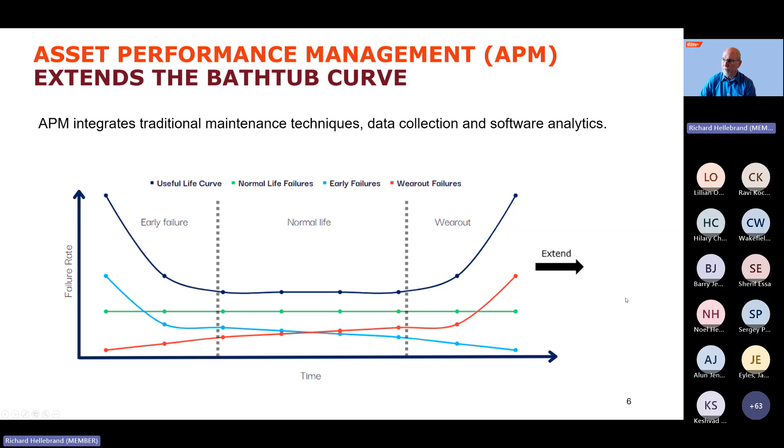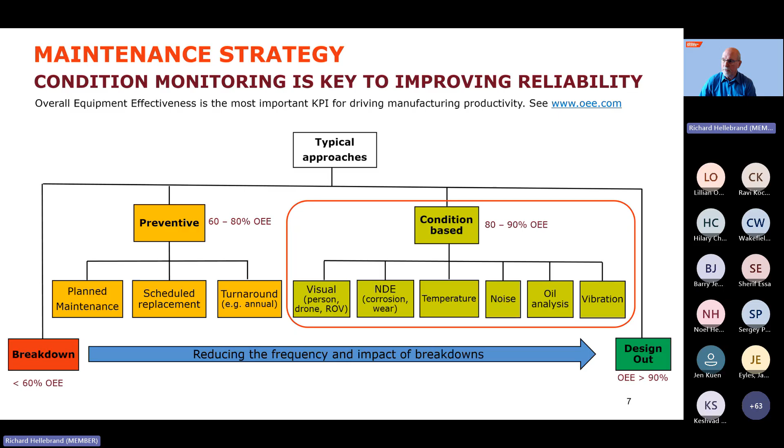It's very hard to do that. I've got some background in this, but I'm very interested to hear what TÜV Rheinland have got about APM, because really when I was practicing, it wasn't APM, it was just asset integrity management, and the new technologies were just coming in as new. I think everyone probably on the call knows that you've got easy availability of infrared cameras, oil sampling from basic taking a sample and sending it off for analysis, to actual remote full online stuff.

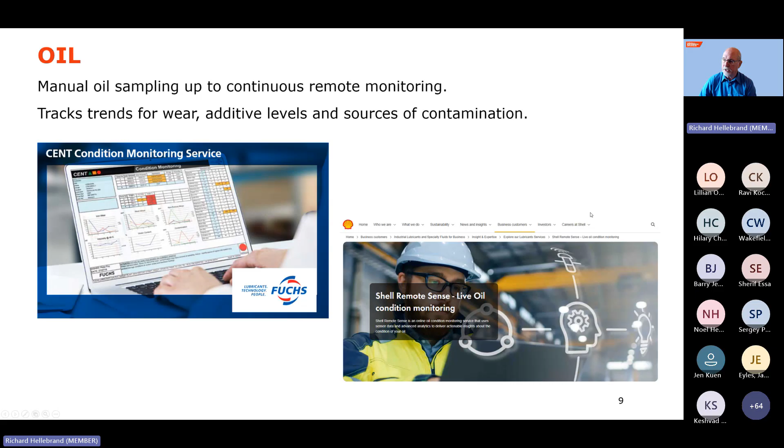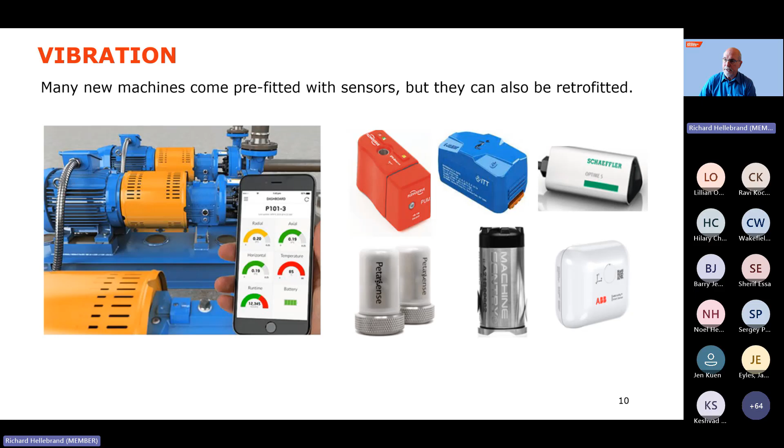And plenty of other suppliers are around. And the same with vibration monitors, which are mainly on rotating equipment - lots and lots of suppliers of these, from cheap and cheerful up to very sophisticated, networked, ATEX approved designs. So that's it from me.

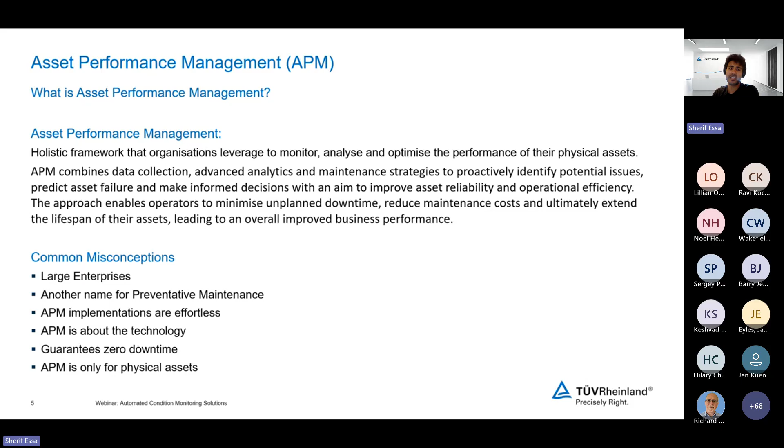And so why do people gravitate towards APM or any technology out there on the market? At the moment, as I'm sure most of you will know, there's a lot of challenges in the market, whether they're political or site specific or equipment specific. But ultimately, we're all in a market that requires incredibly reliable assets with very little investment that's willing to go into a lot of these assets. So as engineers, our role is to get the most out of our assets with as little investment as we possibly can put into these assets. It's not an ideal world, but it's the world we live in.

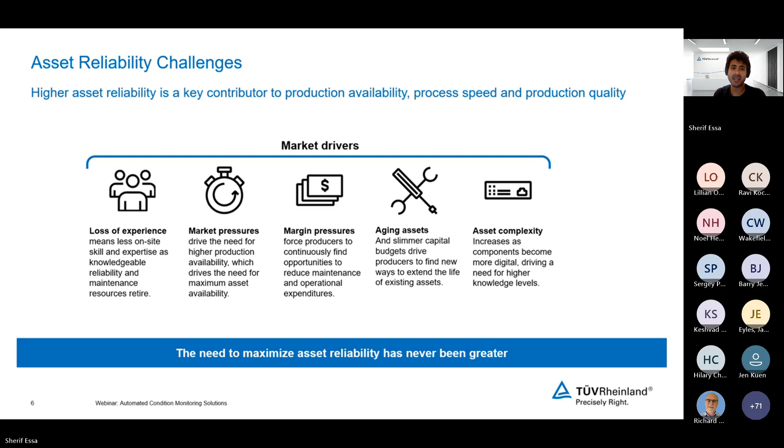And so why does APM fit in? APM fits in because it promises a lot. It promises to minimize your spending on OPEX. It promises to improve your uptime. And if you believe the ARC survey that was conducted, most operators can eliminate between 3 to 5% of their unplanned downtime. So obviously the apple is there, it's big, and a lot of you will want it.

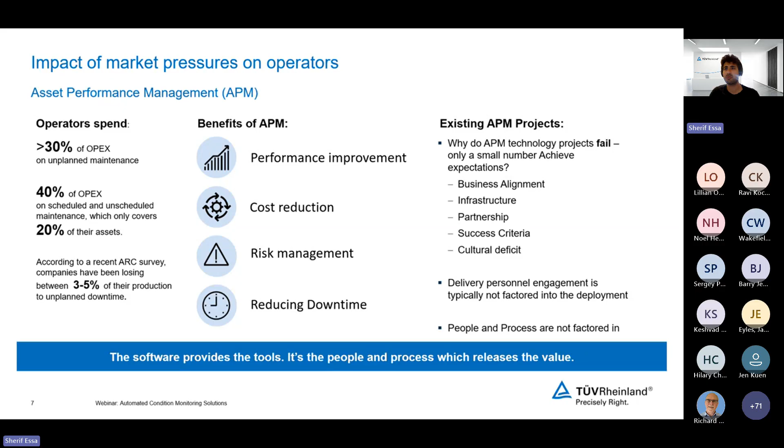But unfortunately, the reality of APM is that it often doesn't meet expectations. And that's largely because, at least in my experience, the people and processes aren't generally aligned with the technology. There's a lot of focus on the technology, but people generally leave the people and process out of it. Ultimately, software is just software. It provides you with more information or more insight, but it's your people and process that will drive the value, and that's what will actually make the difference.

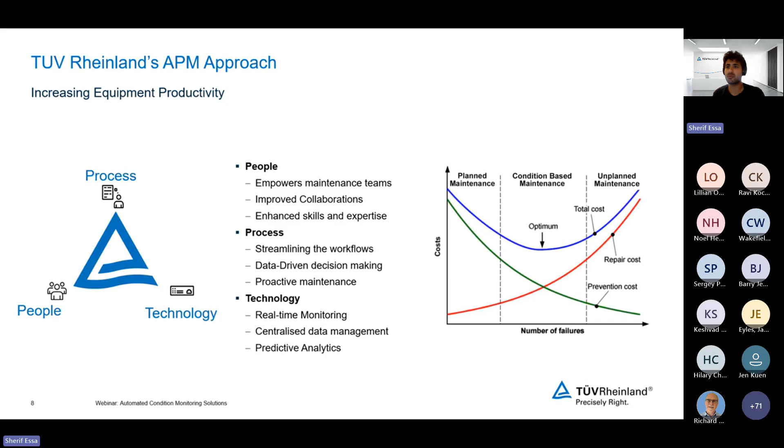So this is the TUV approach, and this is what we try to bring in as part of our organization. I'm sure as mechanical engineers, a lot of you will have seen numerous bathtub curves. But essentially what we believe in our organization is that if you bring the people and process together, you can reduce how much you spend on technology and also improve the effectiveness of the technology that you deploy, bringing you somewhere near the middle. And that's the optimum place where you want to be, where you're spending just about the right amount of money on the technology to get the real value out of it, without the excessive costs of some of the technology out there.

Moving on to the next slide. So TUV's got an approach for both static and rotating equipment. For this part of the presentation, as I mentioned at the start, I'll be largely focusing on the rotating equipment with the sensors on board. If you go to market, as Richard mentioned earlier, there's thousands and thousands of sensors out there. And a lot of them will promise you the world, as sales will commonly push out. But it's down to you to make the distinction and prioritize where these sensors make sense. The best sensor for you, you should be able to determine from your detailed risk assessments, whether that be RBIs or failure mode, effects and criticality analysis.

And these detailed risk assessments will tell you where you should be putting sensors, what degradation or failure mechanisms you're looking for. And as a result, if you're monitoring these things, you'll be able to identify the failure long before it occurs. And it'll give you that value that you're after.

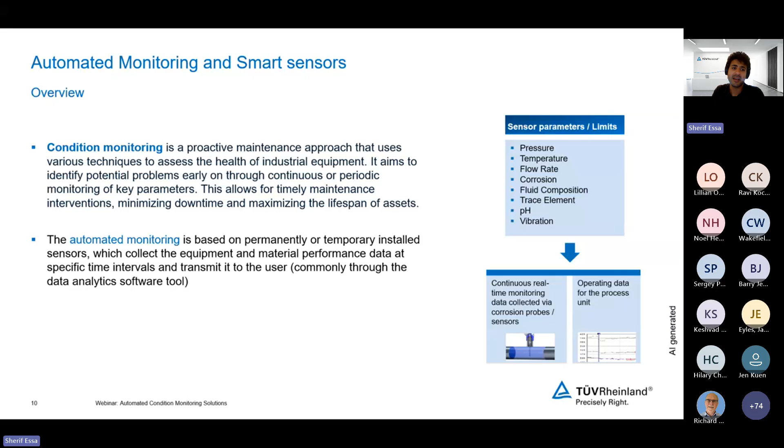So I'm not going to go into detail of all the sensors out there. You can use them in numerous ways, but feel free to do your own research on them. But as part of today's presentation, I'll be focusing on the ABB sensor. But just to reinforce Richard's message, there are a lot of other sensors out there. The ABB sensor is one I'm very familiar with. I can talk about it for days, but there are other ones out there.

So as I mentioned before, although I am focusing on the technology, it is important to remember that the people and process bits are what will drive a lot of the value out of this technology. The technology is just one attribute of what you're going to get out.

So on screen, I've got the ABB sensor. It's about the size of your hand. It's relatively small. It's got a lot of features to it, but two key features that I'd like to bring out are that it's got a 15-year battery and it's jet proof. So you can put it in most environments and it will survive fine. It's also ATEX rated for those who are concerned.

What this sensor does is it measures some key metrics from wherever you mount it, and the key ones I've listed on the screen. And then using the measurements that it's taken, it will calculate some other metrics, and all of them are listed down here. So you've got the vibration side of it, but it'll also calculate misalignment or cavitation, depending on the type of equipment that you mount it on. And all this data is pushed into this neat platform, and it'll give you visibility of the data, but it's down to you guys as the engineers to make the decision out of this data.

So going through the first example, this is a sensor, and I'm displaying a vibration period of 60 days. The sensor has been in operation for 60 days. And for those of you who will have already spotted it, in some cases it's gone above the threshold. In other cases it hasn't. But when you first mount these sensors, they don't just work immediately. They take a little bit of time to gather enough data, and you set the right benchmark.

It doesn't happen overnight. But once you've got the right benchmark, the engineers will play with it or tweak the sensor settings to redefine what is the upper threshold, what is the medium threshold and what is the lower threshold in terms of where this asset should be. And this is where the reliability engineers get very keen and like to look at this kind of data.

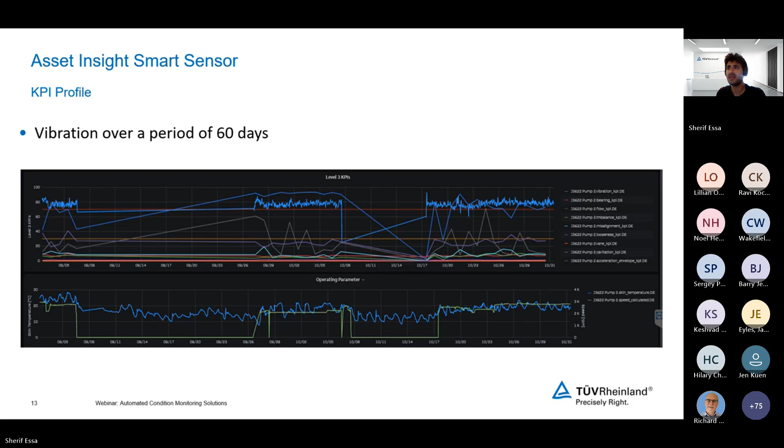And one of the most rewarding factors from my perspective is that you can see once the bearing was changed, or sorry, the issue was addressed, you could see the system operating again in the safe threshold. So the work was done, and it was also done to a point where the asset is safe. So there's less residual risk in this particular asset.

And this is always good reaffirmation, at least from an operator's perspective, to see that yes, the work that's been done on this asset has delivered the value that you anticipated it to deliver.

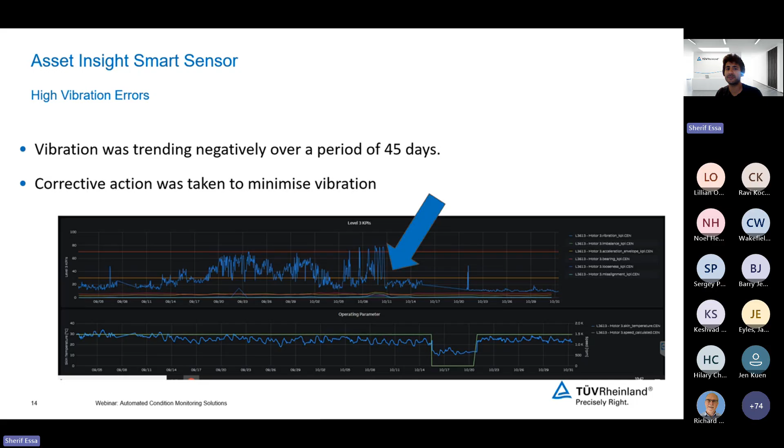And again, after the work, you could see that the system has gone into the safest thresholds, or back to normal operating conditions. So with a little bit of forward planning, you can address issues long before they turn into serious ones.

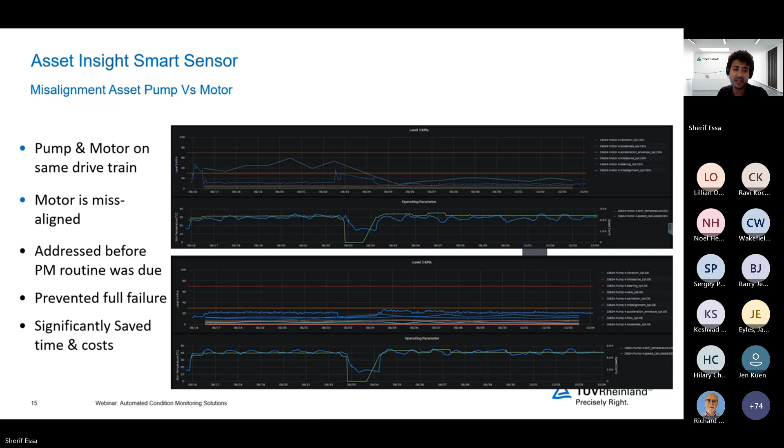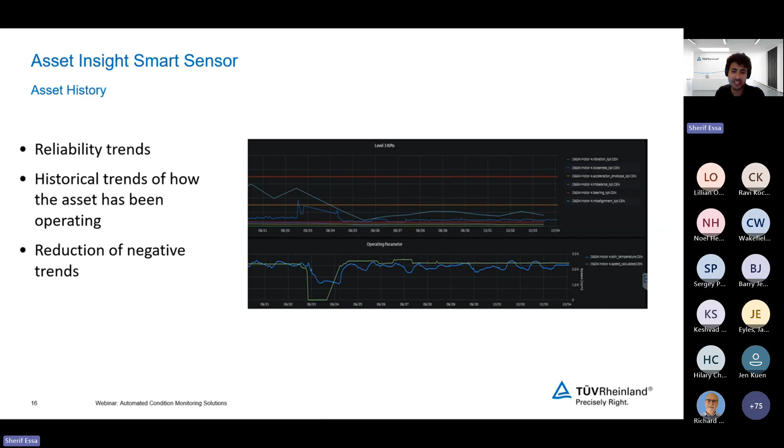So if you've got motor A and motor B, and they're not behaving similarly or there's something different about them, then you can start to pick up these trends earlier, address them and introduce them as part of your people and process changes. But ultimately, the key message is that technology is just one attribute of your maintenance reliability. It's the people and processes, and how they adopt the technology, that'll give you the value. Now, I'm going to pass on to my colleague, Sergey, who will talk about static equipment.

Sergey? Yes, I think I'm unmuted now.

Thank you, Sherif, for these informative insights into condition monitoring of rotating equipment. In addition to rotating equipment, asset performance management equally applies to condition monitoring of static equipment, and this is my area of expertise. My name is Sergey Putintsev. I'm business field manager within TÜV Rheinland UK, responsible for industrial inspections, material testing, and non-destructive testing.

Today, I will look at automated condition monitoring solutions for corrosion monitoring, which is the most common damage mechanism at chemical and petrochemical facilities. There are other damage mechanisms, for example creep and creep fatigue, especially in the power industry, and there are very interesting automated sensors developed for those specific applications. If anyone is interested, please contact me and I will provide further information. But today, let's dive into corrosion monitoring.

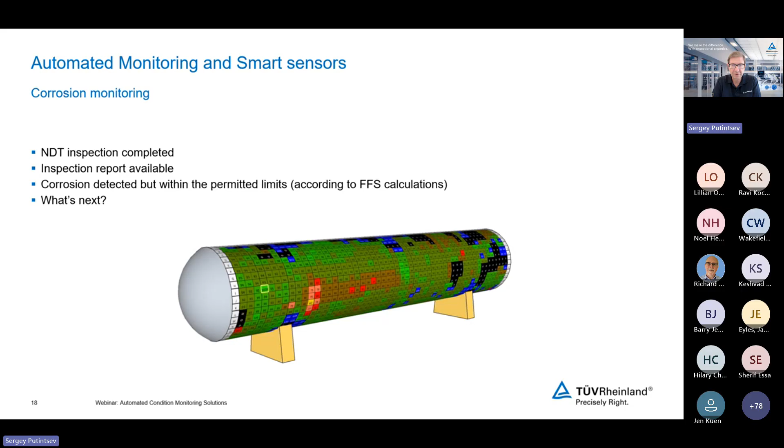These questions will be: do we consider general corrosion or localized corrosion? In most cases, we are talking about localized corrosion. Is the corrosion rate linear or non-linear? Again, in most cases, it is not linear. And do we have detailed information on how the assets operated? The answer is yes, but it's not commonly consolidated with the inspection data. So this raises a number of challenges.

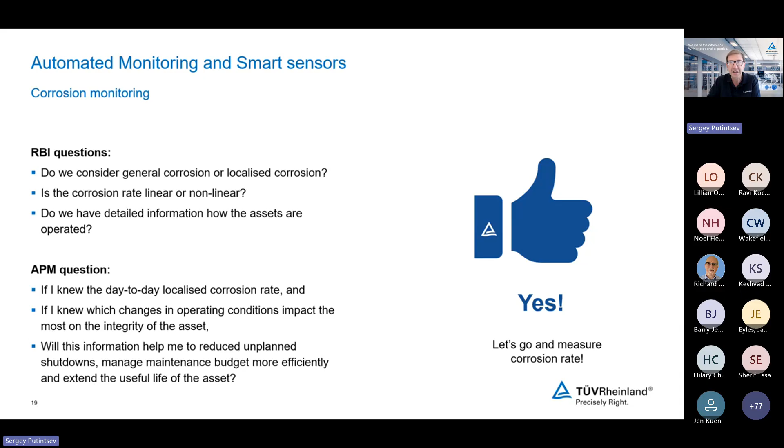Maintenance managers and process engineers would ask themselves: if I knew the day-to-day localized corrosion rate, and which changes in operating conditions would impact this rate, then could I run my assets more efficiently, manage them better and extend their life? Of course, the answer is yes. So let's go and measure this corrosion rate in order to answer those questions.

Here, let's compare the data that we can collect through manual inspections. When we talk about corrosion measurements, we basically take wall thickness measurements. We can do it manually through, let's say, manual UT, and compare it to automated monitoring. This example comes from one of our partners in the US, where a certain asset was monitored on a continuous basis, and inspections were taken at a regular interval every second month and plotted onto the graph.

As with any manual NDT, there could be some deviations, and you'll always be asking what the reason is. Is it exactly the same location where the measurement was taken? Was there any impact of temperature, or maybe a wrong calibration, or could it just be human error? That always comes with manual measurements.

But more importantly, if we take these measurements for granted, there is a question: how could I calculate my corrosion rate? Am I crossing these dots this way or a different way? So which corrosion rate am I taking? Is it the red line, which shows steep growth of corrosion, or the much more stable blue line?

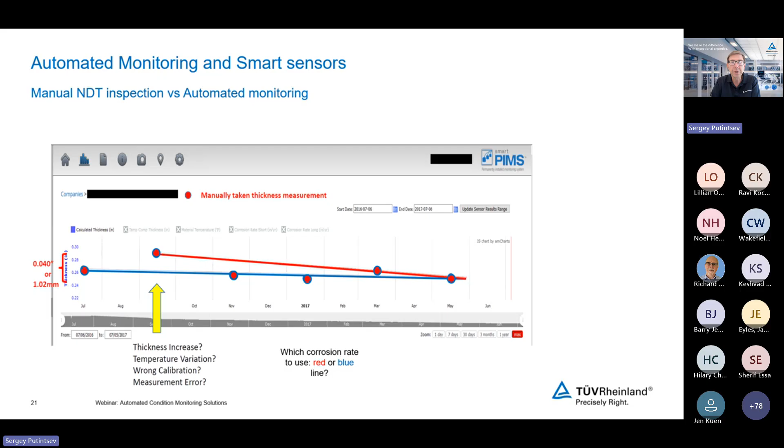So what happened in this specific case is that, in parallel with manual NDT, there were sensors being installed at the same time which were taking measurements every hour, because that's a benefit of an automated system. You can program it and take measurements at any intervals that you wish. Then we can plot the data and compare automated measurements with the manual ones.

And here you can see that the data is much more accurate because it is collected exactly from the same location, exactly at the same condition. But also you can then analyze the trend and compare it to any changes in the processes.

And what happened here is that there were specifically two changes in the process which immediately impacted the corrosion rate. That was picked up by the sensors because they were taking very frequent and accurate measurements. Obviously that wouldn't be possible just by looking at the manual UT measurements that we commonly have in our facilities.

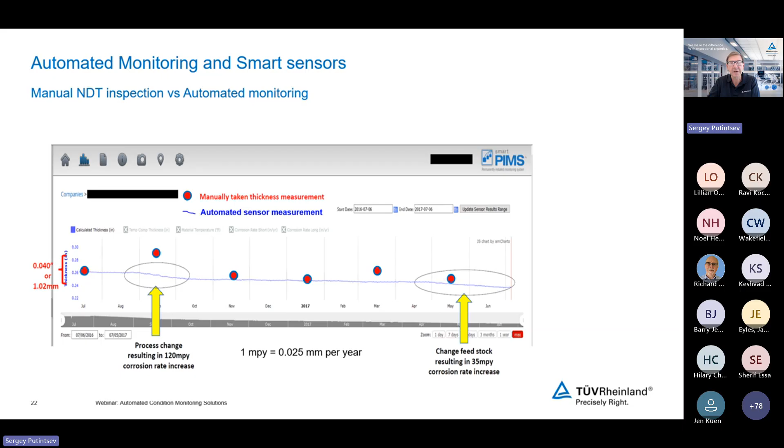So the advantages of sensor technology is that corrosion is very rarely linear and continuous. There could be unexpected and irregular intervals where something prompts corrosion to accelerate, and something that inhibits and depresses the growth.

And for that reason, periodic inspections with very long intervals between inspection points are not able to raise the integrity safety alarm in time.

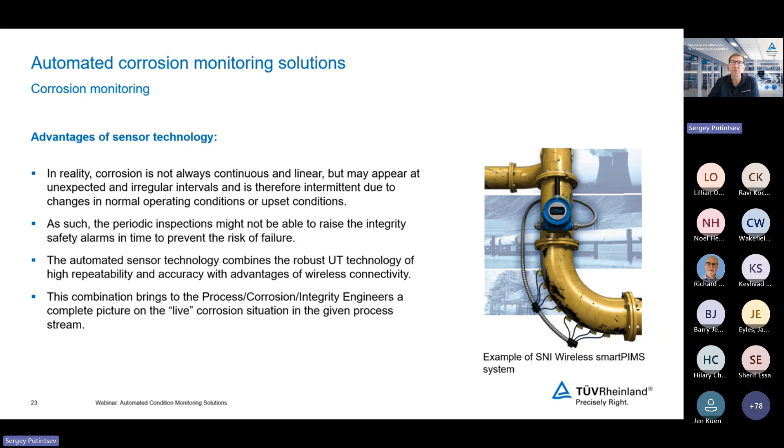So automated sensor technology is based on a very robust UT - basically UT technology, but with very high repeatability and accuracy. It's also combined with wireless connectivity, because you can control and obtain data from those sensors on a wireless basis. That provides quite a lot of advantages, not just for maintenance people, but also for process and corrosion engineers.

Just very quickly, how it works. Richard correctly said that there are a number of sensors. I think you have much higher variety of sensors for rotating equipment, much less variety for corrosion monitoring. Nevertheless, there are a few leading brands that exist in the market.

Sensors themselves are attached to the surface. They can go through coatings. Generally the insulation will have to be removed, but then it can be put back, and the sensors are attached to the surface and remain there. They can operate at low temperatures as well as quite high temperatures.

They are all, similar to rotating equipment, powered by batteries, which last quite long nowadays compared to the early days. The data is transmitted wirelessly - that's the most recommended part. However, you can also connect it through a wire, making a wired connection either directly to your system or to the gateway.

And I think where we actually see more difference between the sensors is not the sensors themselves, but how they're connected, whether they're using a LoRaWAN system or WirelessHART, because there are pros and cons of both connection systems.

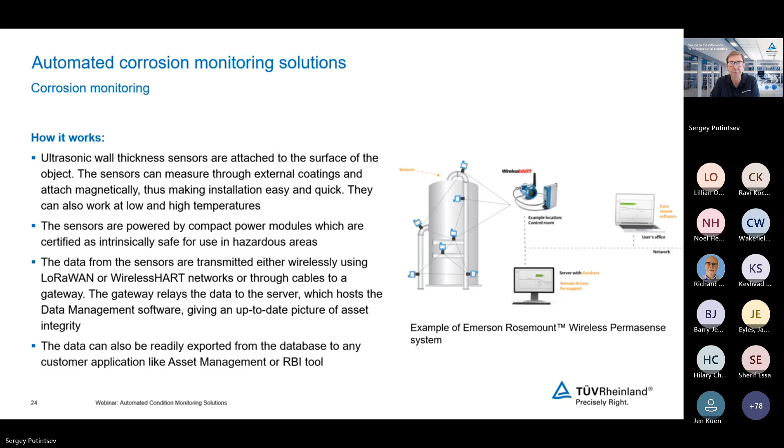I mentioned already the advantages and benefits of automated monitoring for corrosion, and commonly people look at it from a cost savings benefit. That's for maintenance and integrity, and it's absolutely correct, especially if we consider placing those sensors in areas which are difficult to access, or where the cost of removing insulation, recoating, or even getting closer to the object could be more costly than actually performing the inspection. So obviously the automated sensors play a much better role in it.

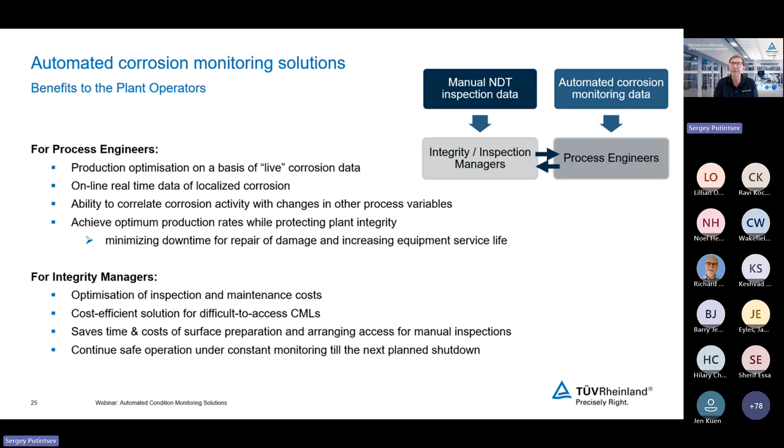However, what I would like to emphasize, and we see this more and more, is the benefit for the process engineers, because they immediately can have access to live corrosion data over a period of time, and they can correlate this to any changes in the process. That is extremely valuable information, because it allows them to optimize production rates based on tweaking certain process characteristics on their plants.

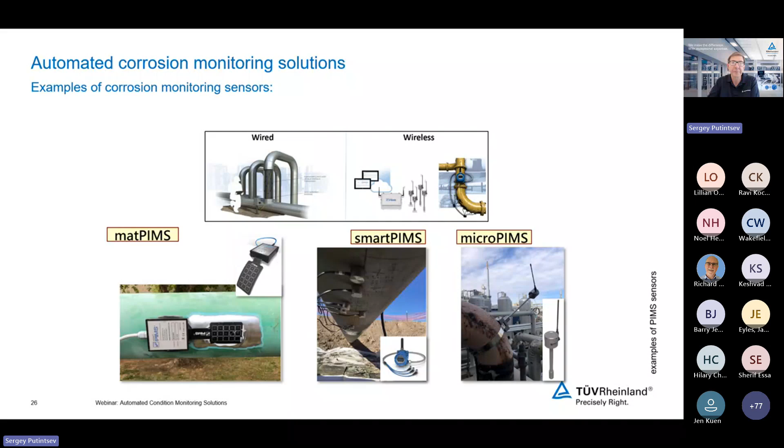Obviously, in an ideal world, and maybe that's what will come in the future with some of the new developments we are seeing, the whole asset surface, or at least critical areas, would be covered with sensors. That would be, I think, the future.

But at the moment, that's not the case, because let's admit it, those sensors are expensive still. The prices are going down as the technology develops, but nevertheless, at the moment, it will not be economical to cover the whole asset with those sensors, especially since UT-based ones are just taking point measurements. They only measure wall thickness where you fix them. So it would be quite costly to cover the whole area.

So what we see is that if you look at the total assets, first of all we eliminate rotating equipment, so we just focus on static equipment: piping, vessels, tanks, support structures. Then through your asset integrity management RBI approach, you select your key critical equipment. Then within those critical equipment, we would recommend to look first for high internal corrosion rate potential, where the corrosion rate is expected to be the highest. And then out of that selected equipment, you can also compare whether it's practical to do it manually or more efficient to do it through sensors.

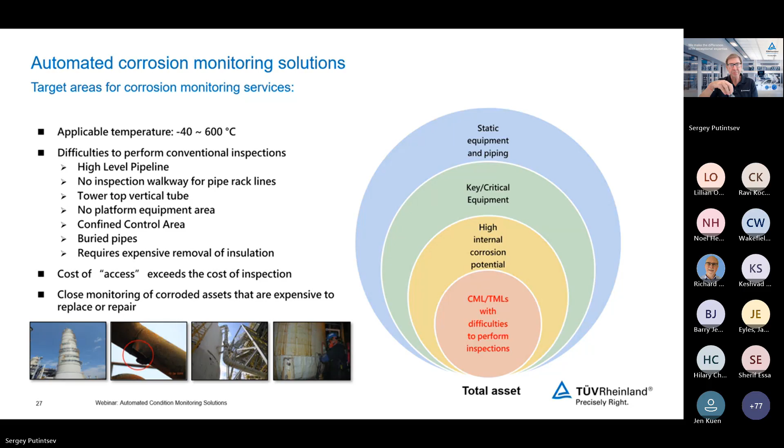Just a few examples, again shared with us by our partner, because it's good to illustrate the benefit - not just cost savings, but the overall benefits that sensors add to the company.

This is one of the vessels which was inspected two times a year, obviously inspected manually with the cost of inspection, and regardless of inspections, there was at least one unplanned shutdown happening every couple of years. So the client decided to install actually quite small - just 4 different sensors. So it's not a big investment in terms of CapEx.

And the corrosion rate was compared with the process changes, and then it was quite clear - and I'll show you the next slide - where the corrosion rate just jumped, and that was when the new dosing was introduced to the plant. Understanding this process, understanding what triggers the corrosion, brought very huge savings to the client.

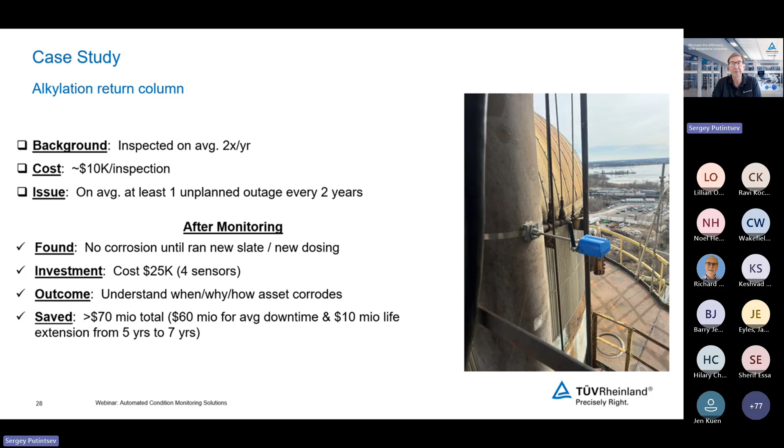Because first of all, there were savings on shutdown time and unplanned shutdowns which were happening, and also an extension of the life of that column. And what you will see is that until there was a process change, the corrosion rate was pretty stable, and that was clearly shown through the measurements. But when there was a process change, you can immediately see the impact on the corrosion rate.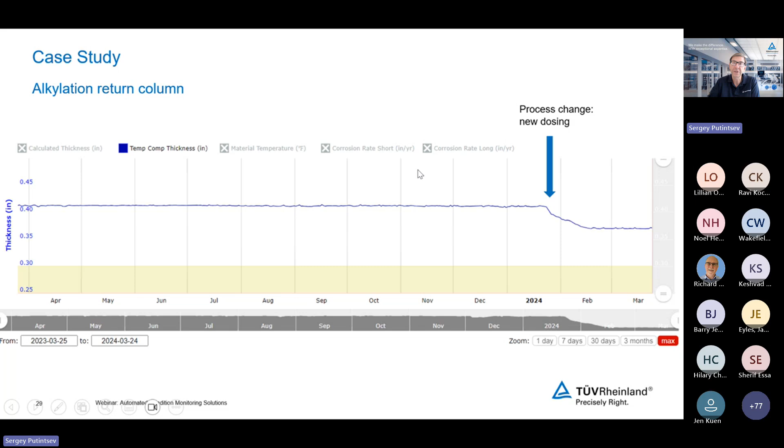Another example, similar, with the sulfur recovery unit. Here, because of the criticality of this asset, inspection was happening monthly, so it was a relatively expensive exercise to do.

But nevertheless, there were unplanned shutdowns to repair the leaks, and that, of course, caused quite a lot of trouble for the management and the operator.

The sensors this time were a much bigger investment, because you need to cover much bigger areas. So 12 sensors were installed, and it was able to show when the corrosion rates were affected and what process change impacted that difference in the corrosion rate.

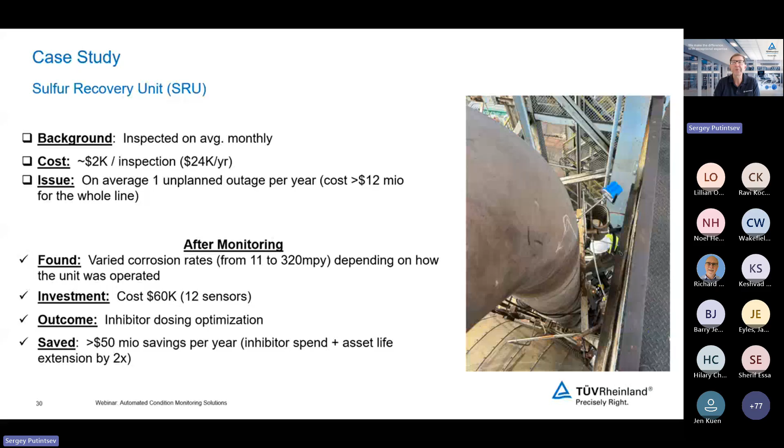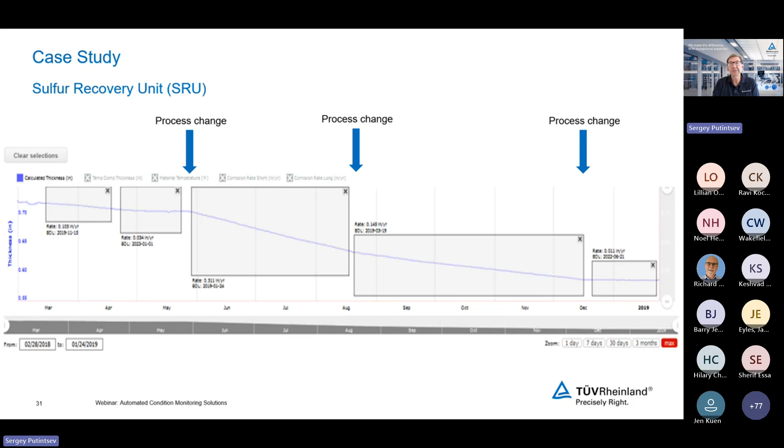This resulted in quite significant savings for the client to optimize the process. Once again, you can see the periods when the corrosion rates were maybe not good, but at least stable, so you can predict it and use it for your RBI calculations - but then the change in the process made a step change in the corrosion rate.

As just a small example, these tubes were actually not considered to be critical, therefore there were no specific inspection requirements or regime by the clients, so there was no cost of inspection - but at the same time there were regular leaks and failures of those tubes. So by installing the sensors, again a relatively small investment, it was identified what causes this spike in corrosion, and actually it was caused by the cleanings.

So the cleanings also then changed from 5 times a year to just 2 times a year, and as a result, the life of the tube increased significantly.

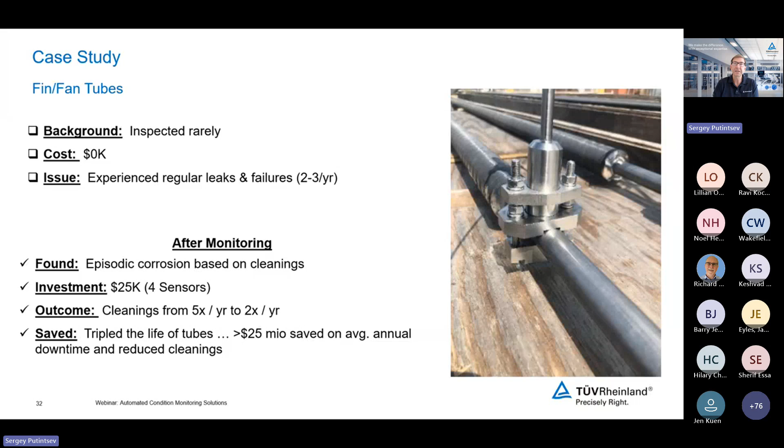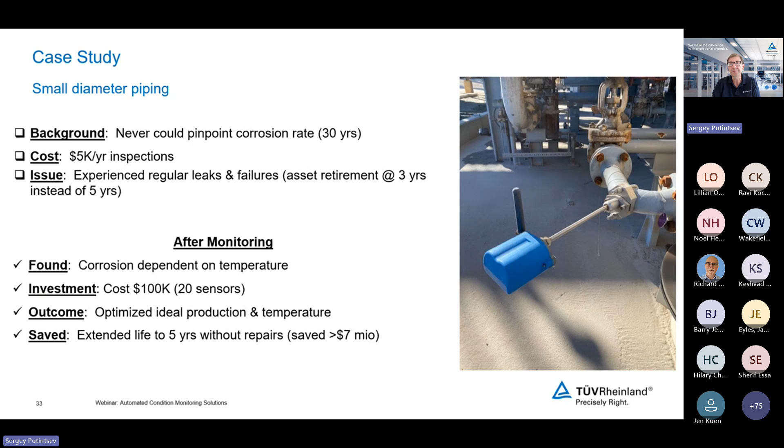One last example on small diameter piping: the client was performing manual inspection and NDT, but despite having the data, the corrosion rate appeared very unstable, so it was difficult to understand what was happening with the process. By installing sensors, which was quite a large investment because you need to collect data from different points, the finding was that the corrosion rate was clearly dependent on changes in temperature.

That allowed the operator to optimize the process and extend the life of the asset while minimizing repairs. So if I give a short summary and conclusion, I'll put it for both rotating equipment and static equipment all together.

As Sherif said earlier, an automated monitoring system provides you with information. That's the best value that they do, and it's quite robust and quite versatile. And now with the development of technology, the variety and capability of sensors is improving year on year.

However, the question is, what do we do with this information? It supports a lot in prioritization of activities, and this is where engineers come in. I would assume that in the near future we will see a lot of impact from artificial intelligence playing in this specific area, helping analyze the data correlated with the processes and helping develop maintenance strategies and best utilization of your assets. In fact, it will trigger a culture change at operators in how we manage our assets. So it gives a lot of insight into the asset.

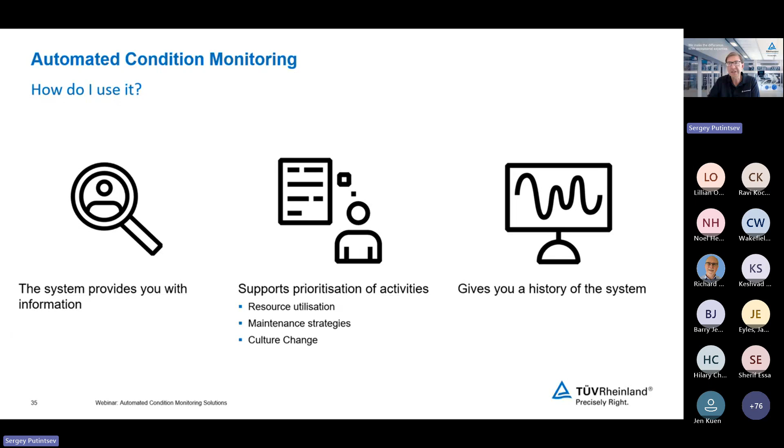But it depends on people, it depends on our knowledge, and hopefully this will be enhanced shortly with some AI tools that we're already seeing in some areas, including our own company.

Our approach to condition monitoring: first of all, we're proud to be experts in the field of overall maintenance and reliability, not just related to condition monitoring, but this is an area of expertise for TUV Rheinland with a very long history working with various assets. We have a very deep understanding of damage mechanisms and how to assess them, and that allows us to work with clients and advise them on a strategy to implement or improve asset performance management on their side.

When it comes specifically to condition monitoring, we advise on what strategy is best, which sensors are better suited, and where to install them. We act independently. We do not manufacture our own sensors, at least for corrosion monitoring and rotating equipment. We have some specialist areas, but not these, so we don't have any biased approach to the technologies available on the market. It's more about providing clients with advice and recommendations, and then afterwards we can assist with procurement of those sensors or leasing from ourselves, and ultimately installing them and helping clients analyze and interpret the data, and decide on the next cycle of how to improve their performance management.

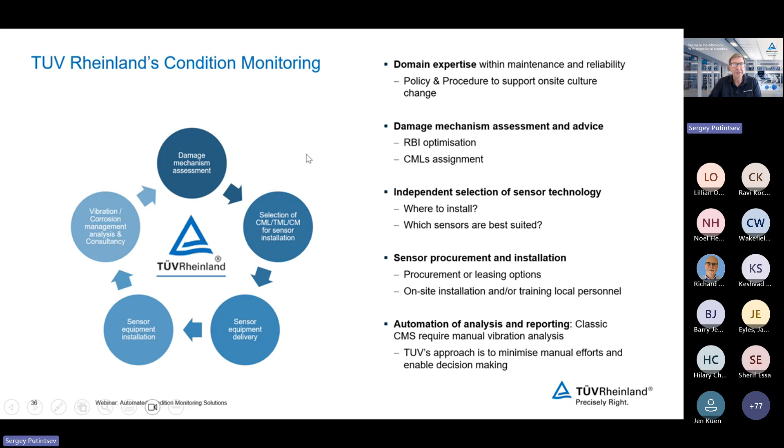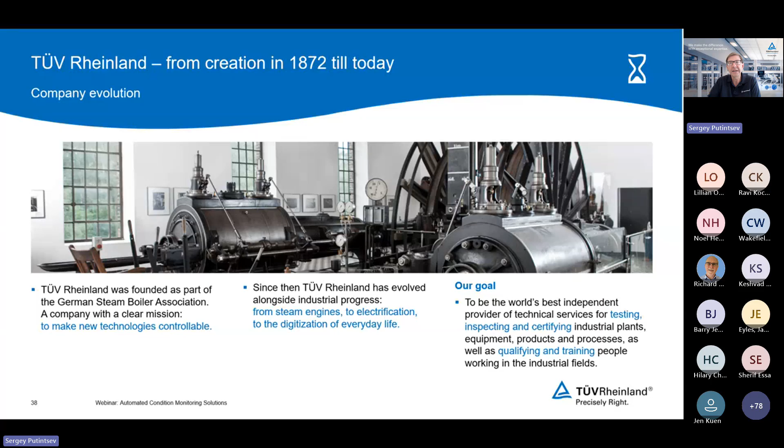I think that's the main part, I won't spend more than a minute. Just to say why we're talking about this: TUV Rheinland has been in this industry for over 150 years, starting actually with pressure equipment, so corrosion, creep, fatigue - all the damage mechanisms are very, very familiar to us, and this is in our blood going forward.

I won't bother you with all the details, but we have different expertise within our organization, over 20,000 people working here. What I want to emphasize as my last point is that within the area of asset performance management and condition monitoring, we have dedicated teams here in the UK working on integrity management for the chemical, petrochemical, and power industries, dealing with aging assets, where we provide clients with the full spectrum of asset integrity management services.

We also have a team working in digital software and artificial intelligence, and we combine these two areas of knowledge together in order to stay ahead of the market on technology development, but also to advise our clients regarding best practices and best approaches to improving performance management.

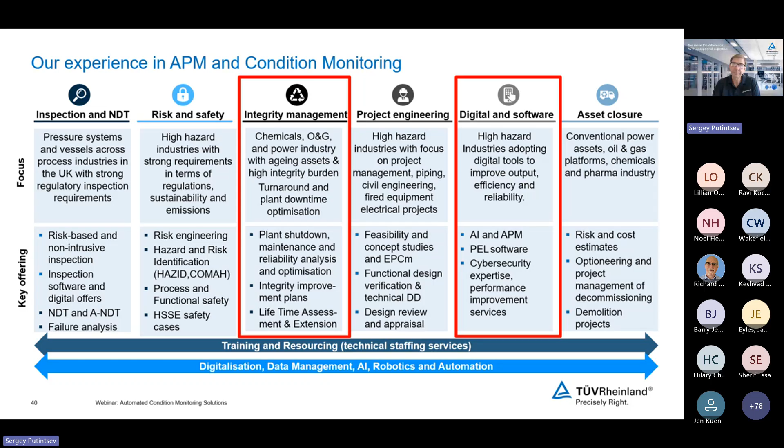Brilliant. So again, perhaps leave that slide up while we're having our Q&A, because then people can note down contact details if they want. I'll have a few more slides to finish off in a minute, but there's actually been quite a lot of questions. Sherif, perhaps you can also turn your camera on.